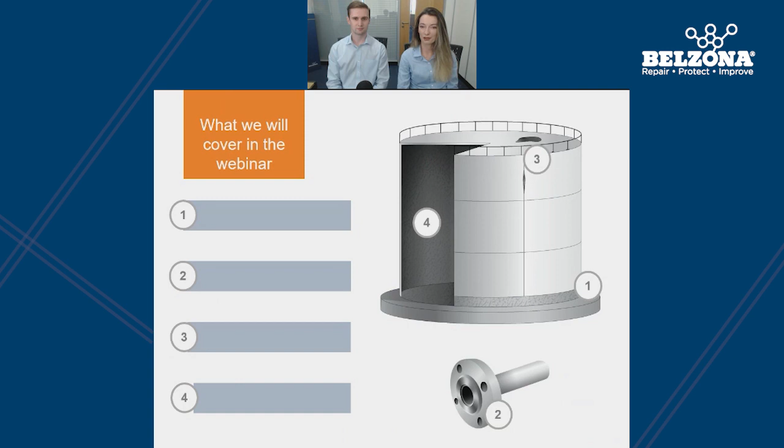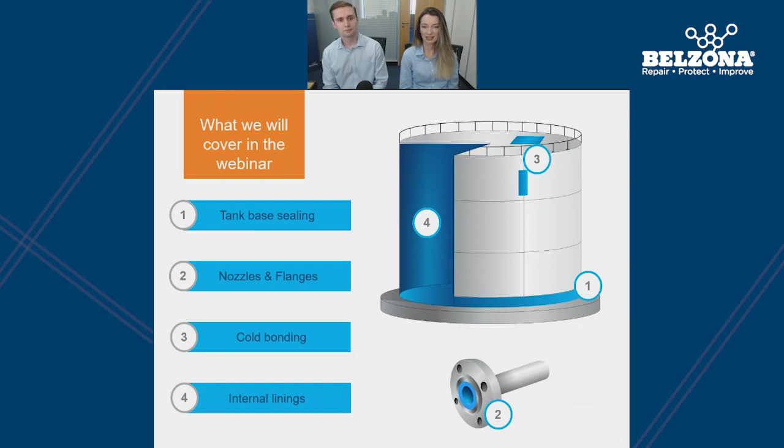So in the next 20 minutes, we'll be going over tank base sealing, nozzles and flanges, cold bonding methods, and internal linings for storage tanks. In this first section, we'll be discussing some of the common problems and solutions we see with tank bases, and also looking at the flexible and breathable Belzona systems used to prevent corrosion at the base of the tank. So now, I'll pass you over to Luke.

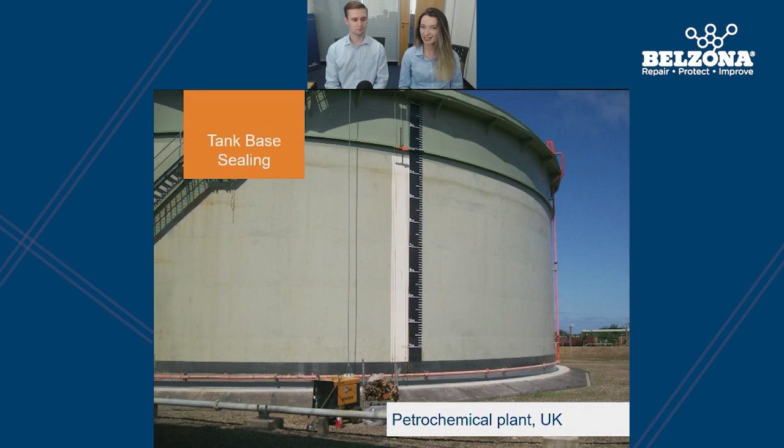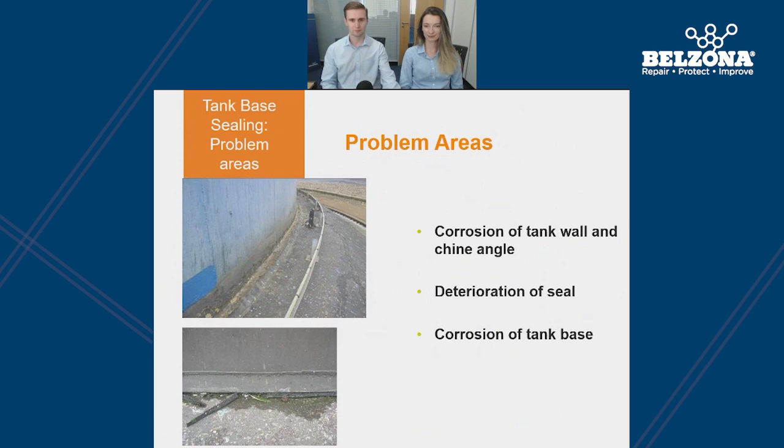Thank you. So we'll start off by identifying some of the key common problem areas with tank bases in industry. So these being corrosion of the tank wall and the chine angle, deterioration of the seal, and also corrosion of the tank base. So to better illustrate this problem, here you can see our steel tank wall, our tank base, and our concrete plinth that the tank sits on.

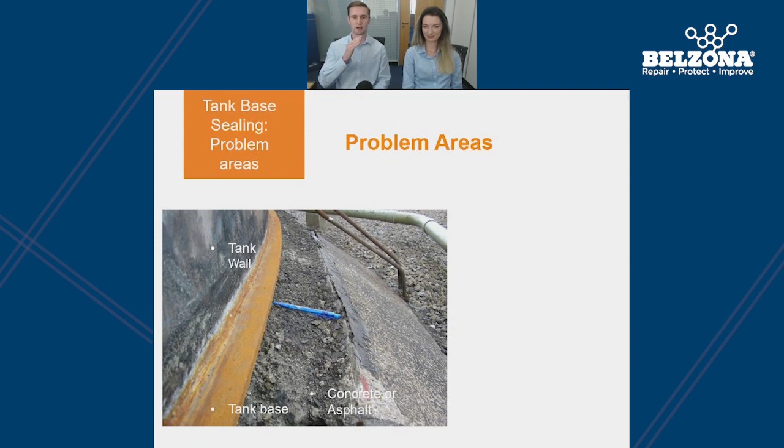So as you can see here, the tank base has deteriorated and broken up over time. So water will no longer be able to flow away from the chine angle, and instead it will sit here at the interface. So as the tank naturally expands and contracts, water will be drawn in at this point by capillary action, causing further corrosion at the base of the tank.

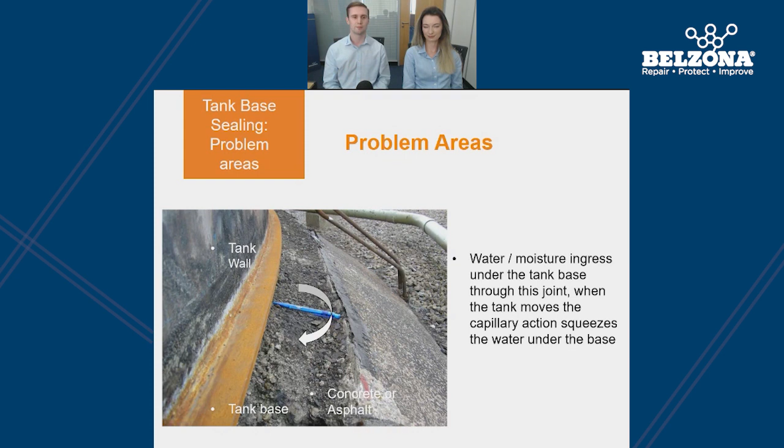So now that we know some of the common problems, we can look at some of the conventional repair methods. So first up, we have mastics and bitumen-based. However, the problem here is that they degrade very easily due to UV exposure, and as the tank naturally moves, they crack and lose their seal. Another common repair we see is steel skirt. However, this involves hot work, and as the newly welded steel isn't protected, over time it will start to corrode again.

Finally, we have bonded rubber, which again, over time, degrades from the effects of UV and weathering, leading to regular replacement of the system, meaning lengthy downtime. So we'll now look at the Belzona solution for protecting tank bases. The Belzona solution, as we can see here, is a flexible microporous system which adheres to both concrete and steel substrates, offering corrosion protection at the base of the tank.

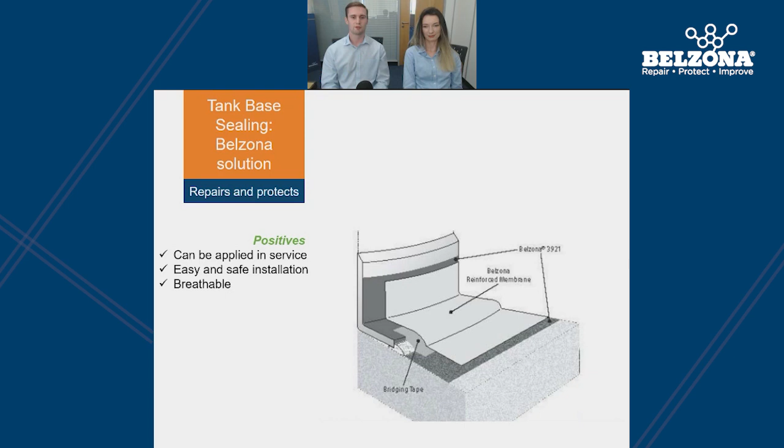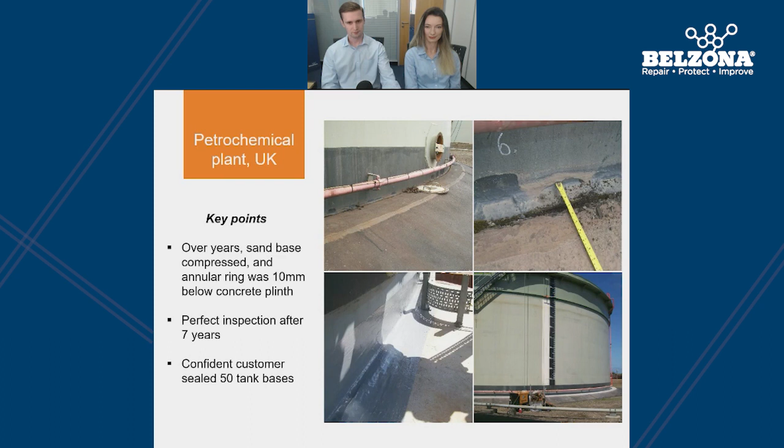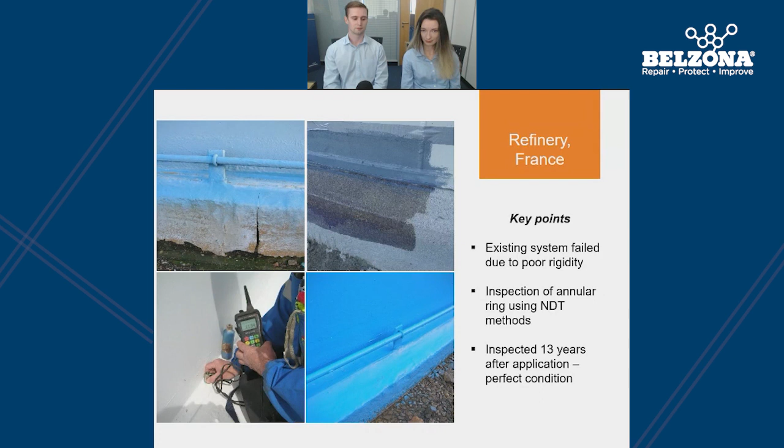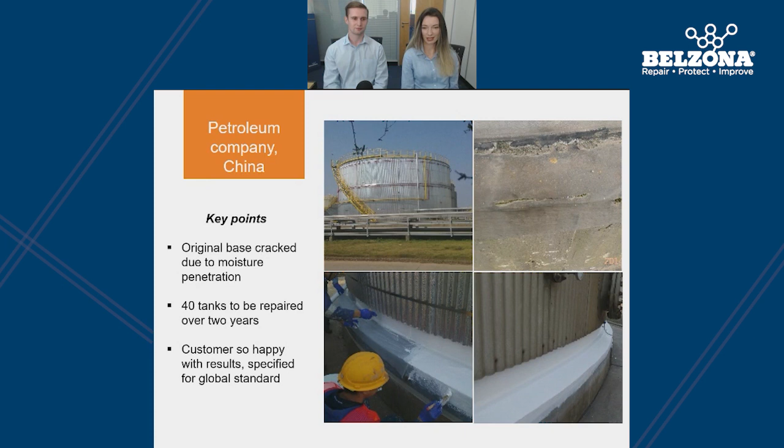After the application, the customer was very happy with the results, and consequently, they ended up using this material on all 40 tanks across their site over the course of 2 years. Also, they specified the solution into the company's global standards. So those were just 3 case studies to demonstrate Belzona materials being used in the field. However, we have performed tank-based sealing applications all over the world.

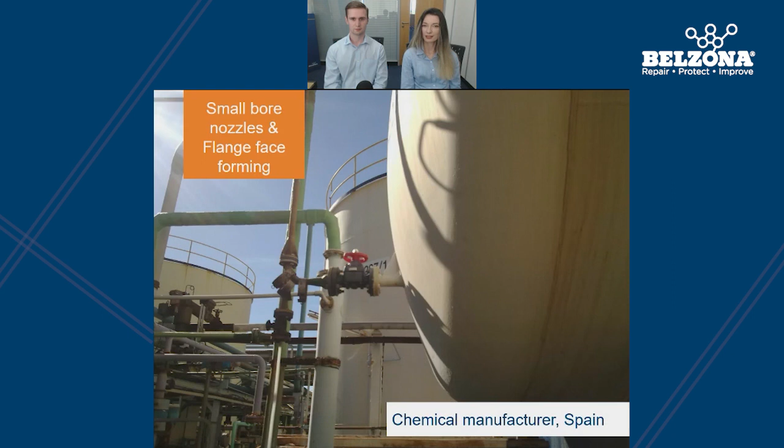So now we're moving on to the next section, and we'll be covering some conventional methods for the protection of small bore nozzles and flange faces. We'll also look at the Belzona solution for these tricky application areas. So the main problem we see with flange faces within the industry is corrosion on the flange face. So this can be caused by several factors.

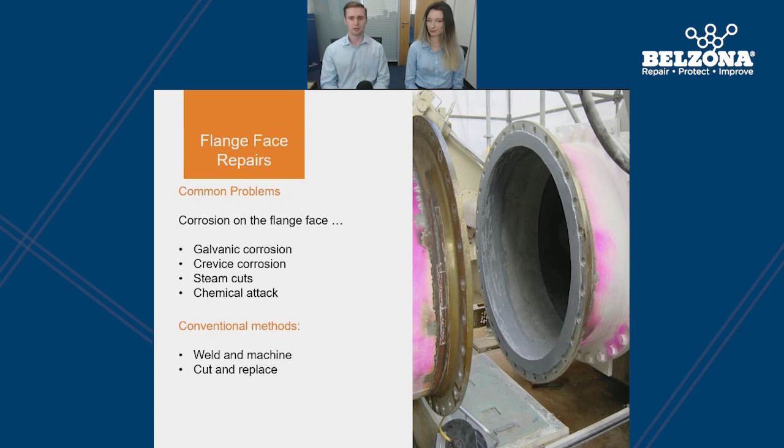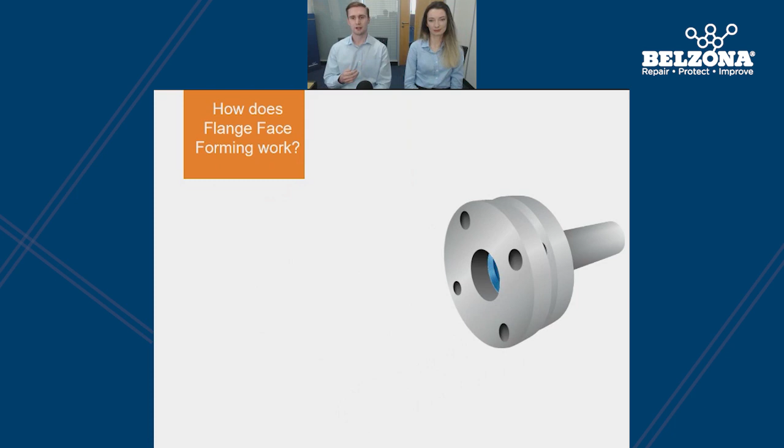So now that we've covered some of the common problems and methods, we can take a quick look at the Belzona solution for repairing flange faces. So how does Belzona flange face forming work? So the Belzona solution is cold applied, and it uses Belzona paste grades to recreate the sealing face using a mold designed to replicate the original dimensions of the flange face.

So the Belzona solution is 100% solids and contains no solvents, so the exact dimensions can be formed. The Belzona solution is also an electrical insulator, so it eliminates any metal-to-metal contact, which means the risk of galvanic corrosion is also eliminated.

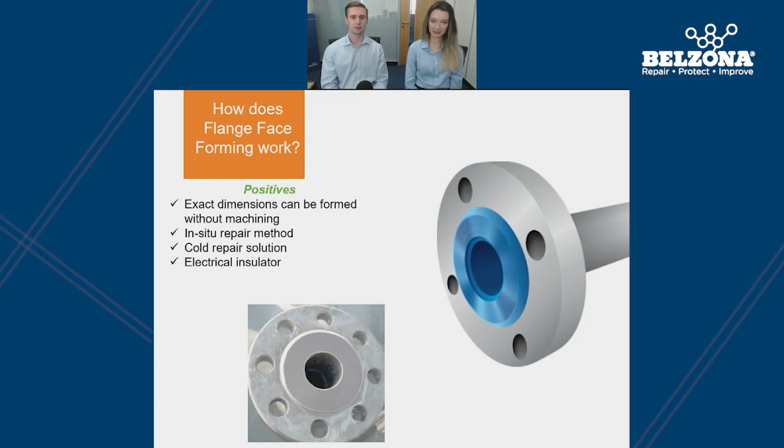The next area we'll be covering is small bore nozzles. So how do we protect nozzles with a 4-inch diameter or less? Often this application is left to contractors who paint very much on a best efforts basis. This is due to the very limited access, which makes it very difficult to achieve an ideal surface preparation and also an ideal coverage of the protective coating inside the nozzle.

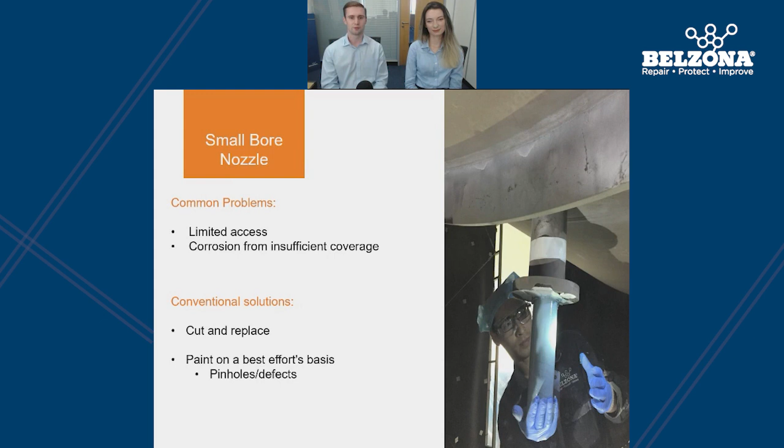The conventional solution for dealing with smaller nozzles is to cut and replace the nozzle. However, this requires hot work and will not eliminate the problem, or as mentioned, to paint on a best efforts basis. So now that we've identified these conventional solutions and their drawbacks, we can take a look at the Belzona solution.

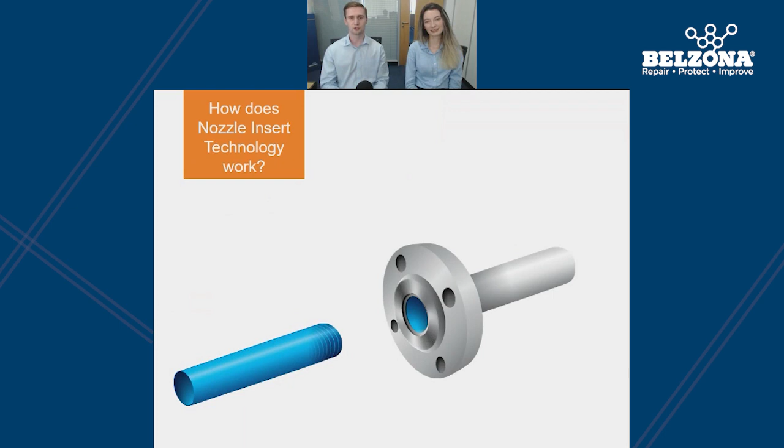So the Belzona solution eliminates any guesswork with small bore nozzles and ensures 100% coverage of the protective coating. So we can do this by prefabricating a section of pipe made from a suitable Belzona material. This is then bonded in place using a Belzona adhesive, which will offer optimum long-term protection against corrosion, erosion, and/or chemical attack.

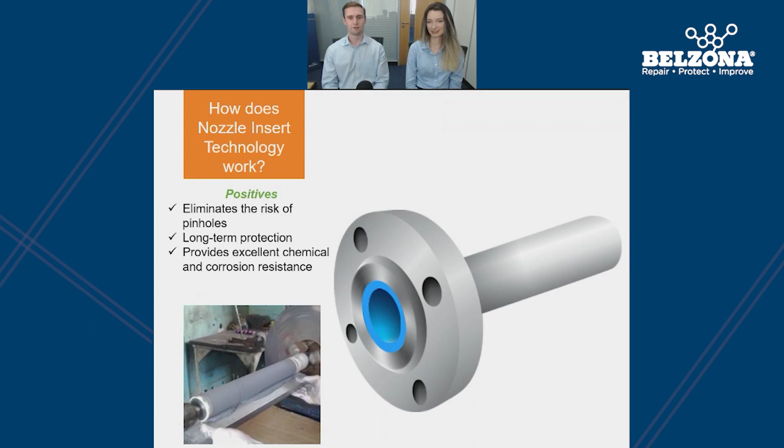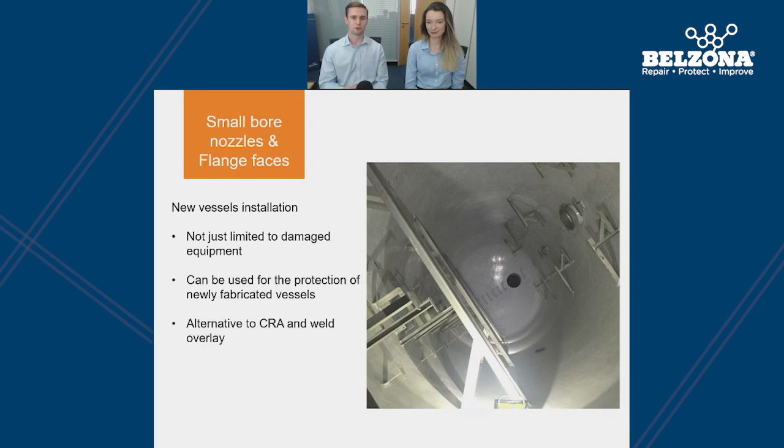However, nozzle inserts and flange face forming techniques are not just limited to damaged equipment, but both systems combined can also be implemented as part of the design for newly fabricated vessels. So these Belzona solutions have been used with carbon steel instead of solid, corrosion-resistant alloys for the nozzle and/or weld overlay for the flange faces.

This case study took place in Spain at a chemical manufacturer. Here, the interior of an ebonite lined nozzle handling 26% hydrochloric acid had suffered damage from the acid and needed a replacement.

However, relining the ebonite would not have been a very cost-effective solution, and therefore a Belzona nozzle insert was chosen to be installed instead. Not only was this better price-wise, Belzona's system had excellent chemical resistance, so will last for the long term. Plus, the application allowed a fast back-to-service time for the tank with its easy in-situ repair.

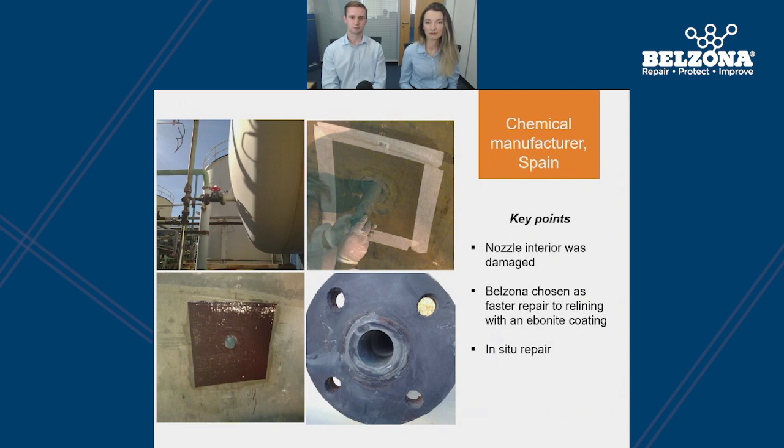Now, in this next section, we'll be talking about how you can use cold applied solutions for plate bonding when carrying out work on the outside of the tank, whether that be the wall or roof. So to start with, Luke's going to look at the most common solution for plate bonding, welding.

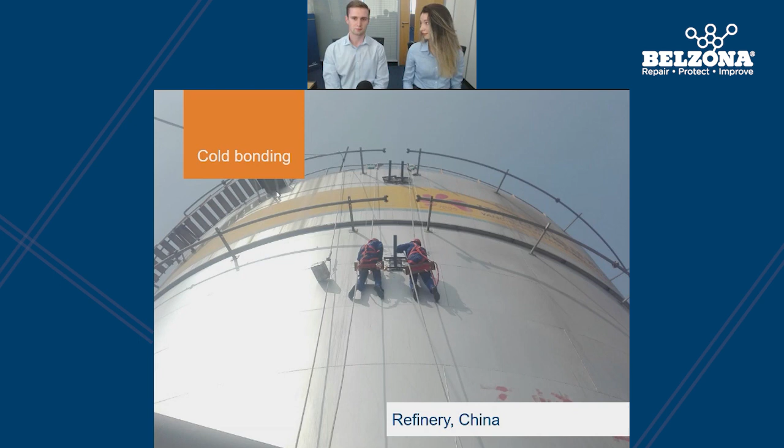So when we talk about adding strength back into the structure of a substrate, welding a plate onto a defect area is a very common method of repair. It provides a strong bond and is a very well-established method. However, before a tank can be welded, it must be drained, which means lengthy downtime and also a loss of resources.

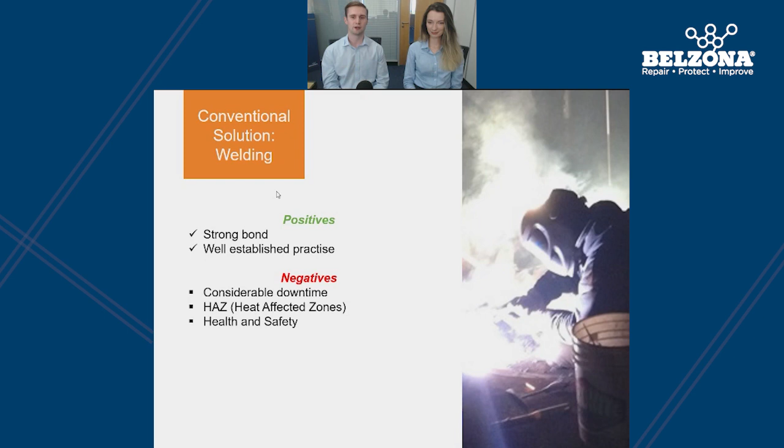Welding also creates a heat-affected zone, so it introduces heat stresses into the metal, which can result in further problems such as cracking later down the line. And as always with hot work, there'll be health and safety risks. Another downside to welding is that there's actually fewer points of contact when welding, which leaves a void between the plate and the wall.

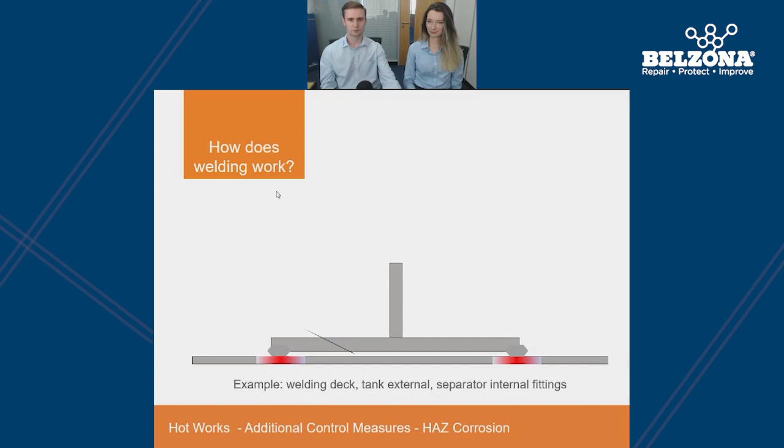So this very simple animation demonstrates a plate being welded onto a metallic substrate. As we can see, the plate is only welded to the substrate at either side of the plate edges. So these are the only 2 points of contact at which the load is transferred between the plate and the wall. So if there was a through-wall leak, for example, this gap would fill up with fluids, allowing the plate to be very susceptible to crevice corrosion.

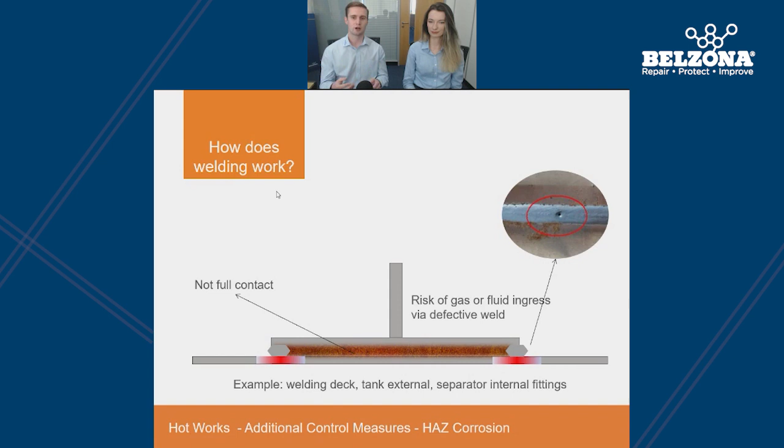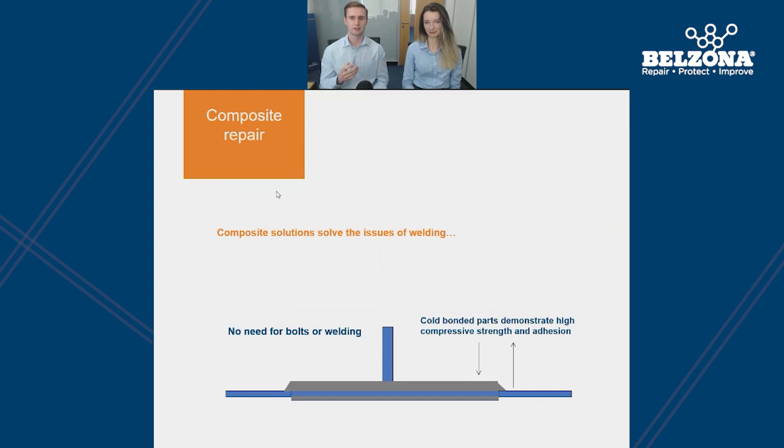And as mentioned previously, these welded areas have also created heat-affected zones. This will change the microstructure of the substrate, which again could cause cracking later down the line. So we'll now look at the Belzona solution for bonding. As demonstrated on the screen, the Belzona solution offers 100% contact on the substrate, which gives an excellent load distribution. The Belzona material, also being non-metallic, acts as an electrical insulator, eliminating any potential for galvanic corrosion and therefore offering long-term corrosion protection.

So now that we've gone over welding and understand how cold bonding works, we can look at the different types of cold bonding solutions. Metallic plate bonding has been successfully used for over 20 years as a repair method. However, in recent years, composite plates have also been used to offer a non-metallic solution.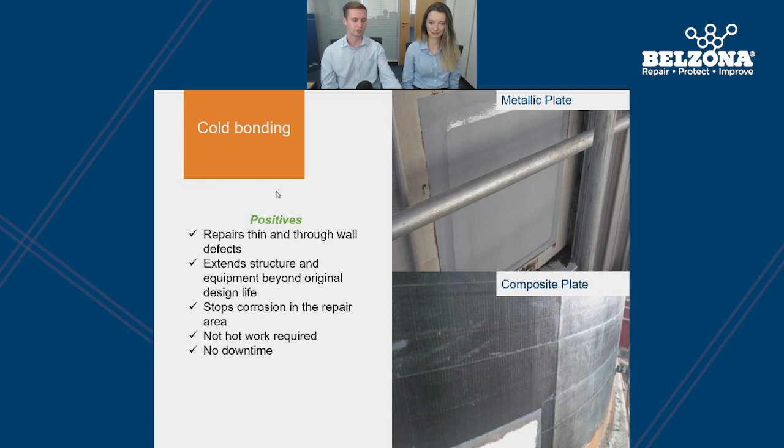Some of the positives of using the Belzona solution include no downtime, as no hot work is required, and therefore no requirement to drain the tank. Cold bonding techniques can also be used to repair thin and through-wall defects, extending the structure and equipment beyond its original design life. So we'll now watch a video on welding versus cold bonding techniques. I'll just put that on the screen for you.

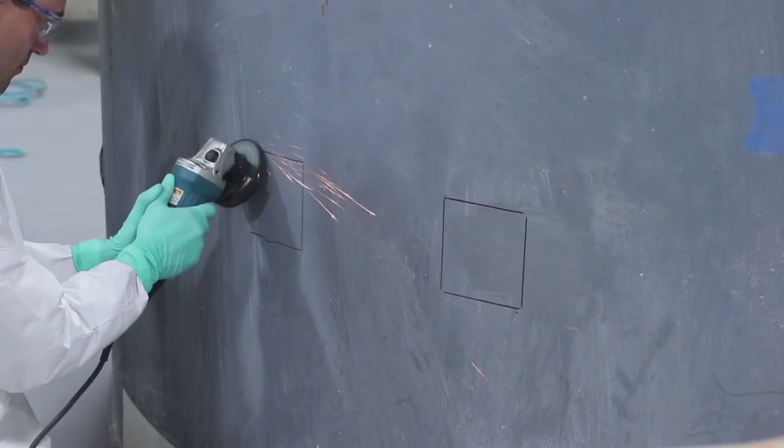Demonstrating the pros of cold bonding versus welding. We attached 2 brackets to a tank. One was attached to the tank via welding and the other via cold bonding. Before we began, we marked out the perimeter of the brackets. For the welded bracket, we prepared the surface area outside the perimeter since welding is done at the edges. We then proceeded to weld the bracket.

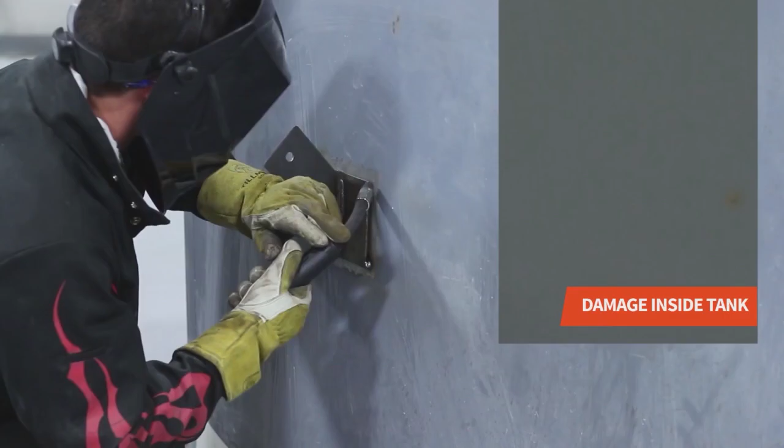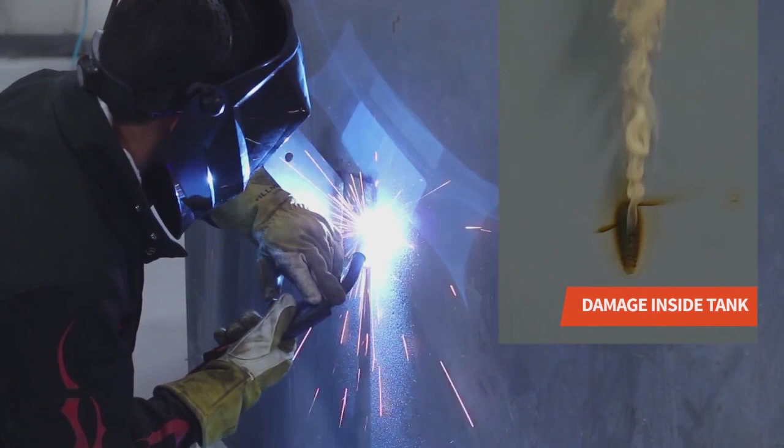As you can see in this video, the tank lining started burning as soon as we began welding. We had to stop welding for safety reasons. For the cold bonding application, we prepared the area inside the marked perimeter since bonding is done on the whole surface of a bracket.

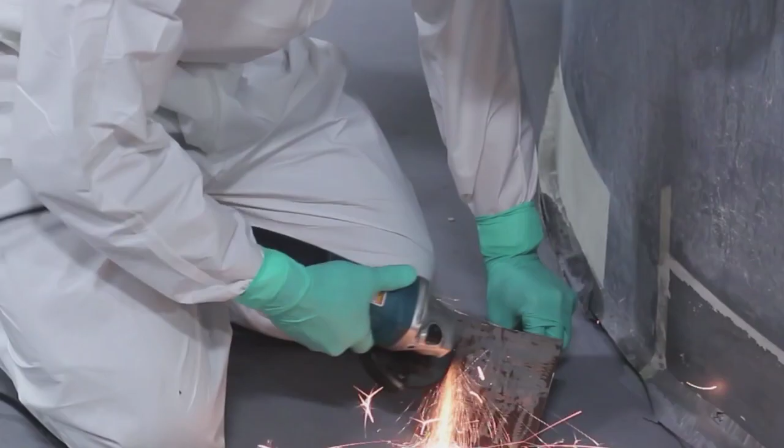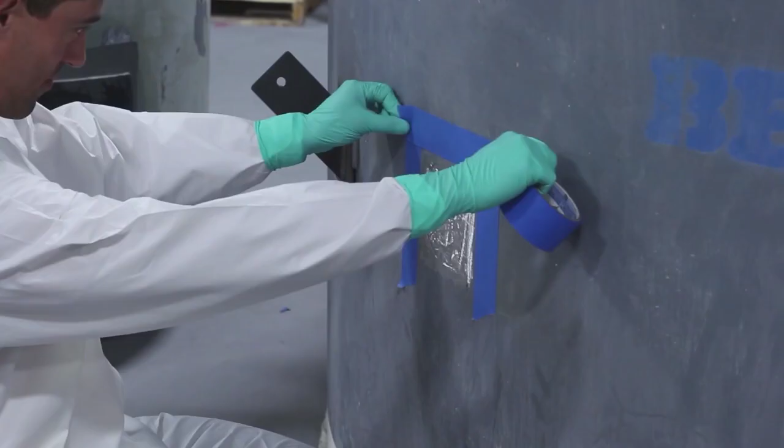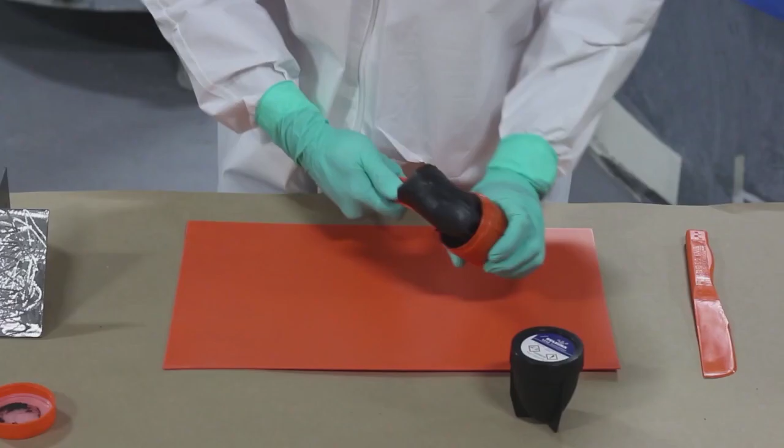We then prepared the bracket. Next, we masked off the application area. We proceeded to clean the area to remove any loose particles. We then mixed our bonding material, which in this case was Belzona 1212.

After mixing, we applied a thin layer to the application area with a stiff bristled brush, pressing hard to make sure the product fills the profile.

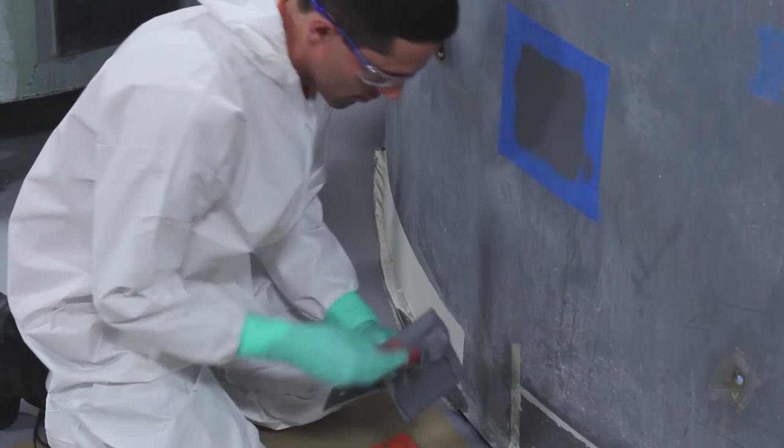We then applied a thin layer of the product to the bracket surface, and more product was applied to build a central peak. We proceeded to attach the bracket to the tank by pressing it with force onto the application area, making sure the product squeezed out of the sides. We cleaned the excess product off the edges of the bracket.

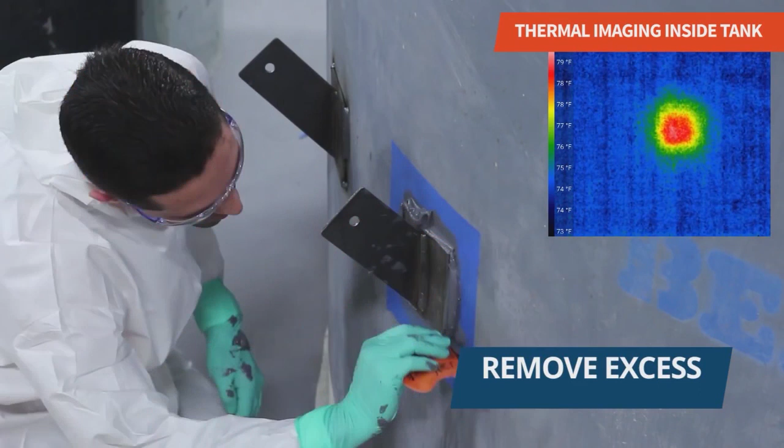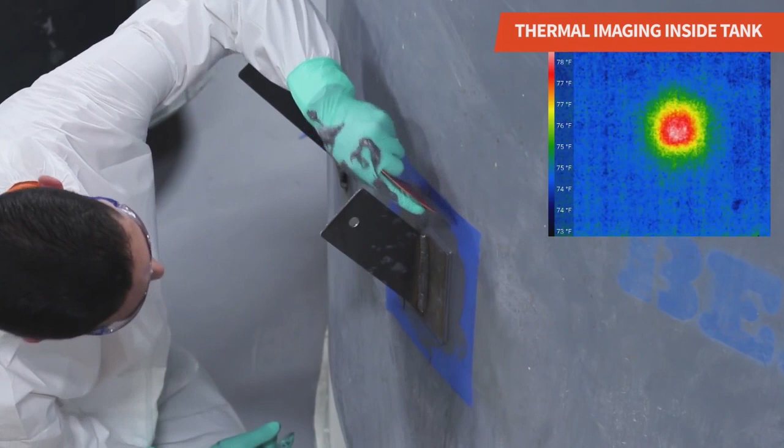We took temperature readings via thermal imaging, as you can see in this video. A maximum of 79 degrees Fahrenheit was reached, which is safe for both the tank lining and content. And removed the masking tape to finish the application. Cold bonding is a more practical and safer choice.

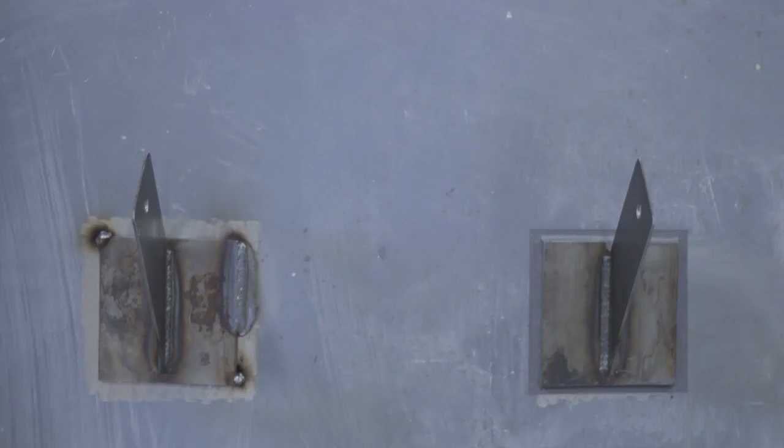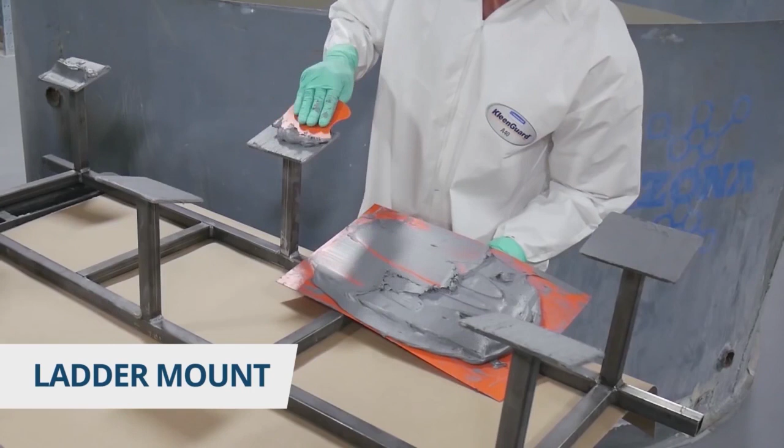Here are a few samples of other cold bonding applications: live leak repair on a tank, mounting a ladder or cell phone antenna to the side of a tank, or even repairing the weld seams by injection. For now, though, we're going to move on to the case study section.

So the first case study was prompted by legislation change in China. This meant that VOC treatment was required to be implemented on all oil tanks across the country. This required the customer to attach pipe rigs to the tank wall, but with hot work restricted in the tank farm, a cold bonding solution was necessary, and therefore Belzona was the ideal solution.

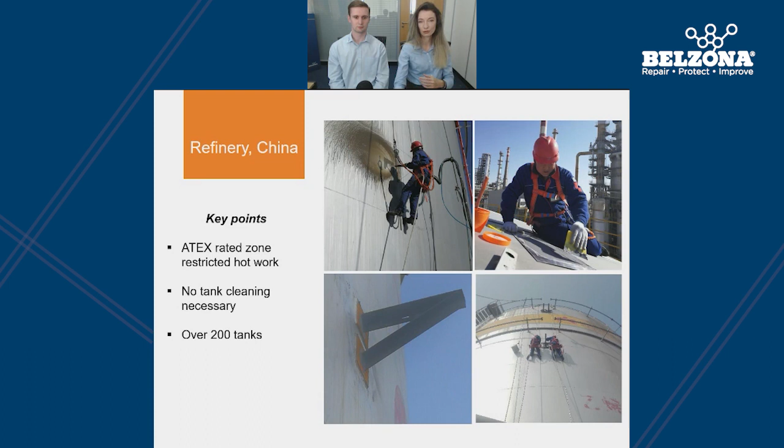To begin with, for this application, they used vapor blasting to prepare the surface. This was necessary as grit blasting was not allowed in this ATEX rated zone. The applications were a big success, and the customer was very happy with the result. So much so that after the first application for 18 tanks, they decided to use the system for more than 200 around the region. And here is a similar case study, but in the Netherlands.

We chose these case studies to show you that cold bonding can be used for plates and so much more. In this case study, the company wanted to bond a water sprinkling system and a foaming system on top of their oil tanks. However, once again, hot work and grit blasting were banned on site, obviously.

Therefore, for each tank, the substrate was prepared, this time with a dust-free blasting system, in order to achieve the right surface roughness, without generating dust and any potential fire hazards near the oil. In total, over 1,000 brackets and supports were bonded onto the sides and tops of 8 different storage tanks, again leaving another satisfied customer.

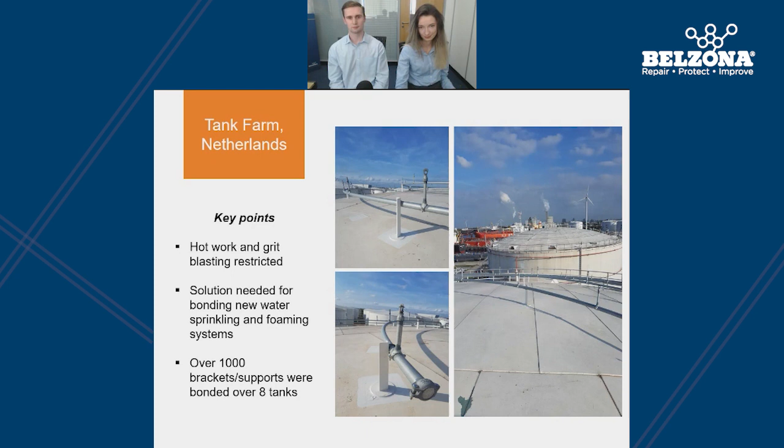So our presentation is almost finished, and this is our final section before our Q&A with the engineers. So you can start thinking of some questions, but for now, we're going to look at internal linings, specifically for the protection of the floor and bottom sections of storage tanks.

So a common problem we see in storage tanks is corrosion on the internal surface of the tank. However, generally the only areas affected by corrosion are the tank floor and maybe 1 or 2 meters up the side of the tank wall. This is because of a mixture of water and hydrocarbons in the tank. And as the density of the water is higher than the hydrocarbons, the water will sit at the bottom of the tank, which is where the corrosion will occur.

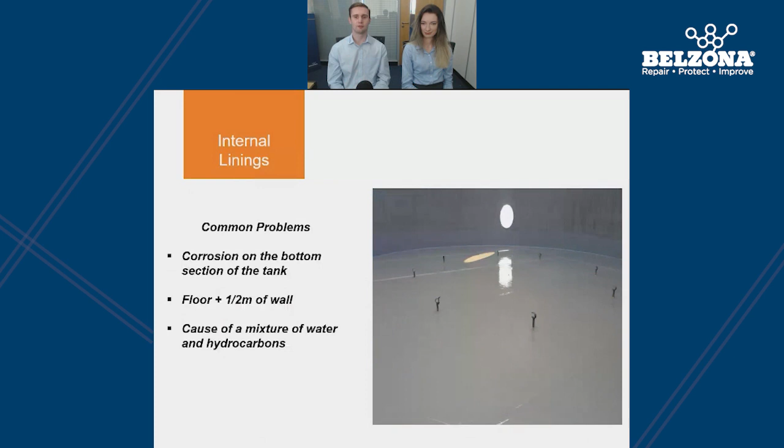So now that we've identified this problem and the reasons behind it, we can take a look at the range of solutions that Belzona can offer to protect these tanks. Belzona have a varied range of products which can be used to restore the damaged tanks. Paste grades can be used for pit filling, and plate bonding methods can be used for the larger areas.

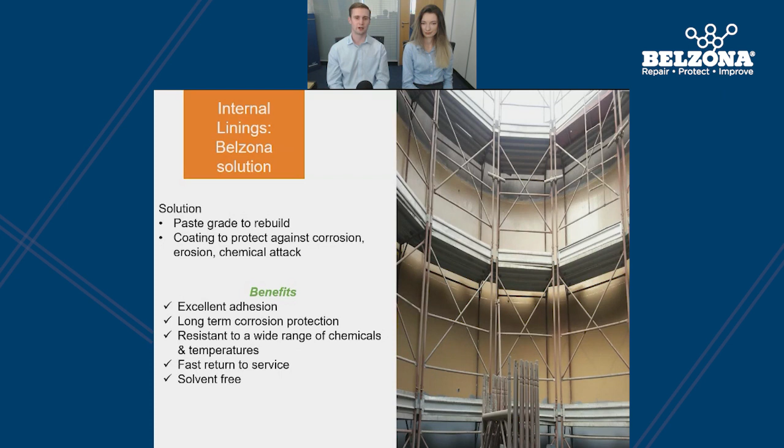So once the structure of the tank has been restored using these methods, the tank will then be coated with the most suited lining based on the operating parameters of the tank. The lining will then be able to offer corrosion resistance in immersion, steam out resistance, and also chemical resistance. So we'll now take a look at a couple of different internal lining applications on storage tanks around the world.

So here we have an oil company in Tunisia who are experiencing severe pitting at the bottom of their storage tank. And as this was a rivet tank, welding wasn't an option, otherwise the rivets would pop off one after another. The Belzona solution here was to pit fill the smaller localized pitting and then use plate bonding for the larger areas.

The tank was then coated with a Belzona lining, which was selected based off the operating parameters of the tank. As the corrosion was due to a mixture of water and hydrocarbons, only the floor and the lower section of the tank wall, as you can see in the pictures, were coated.

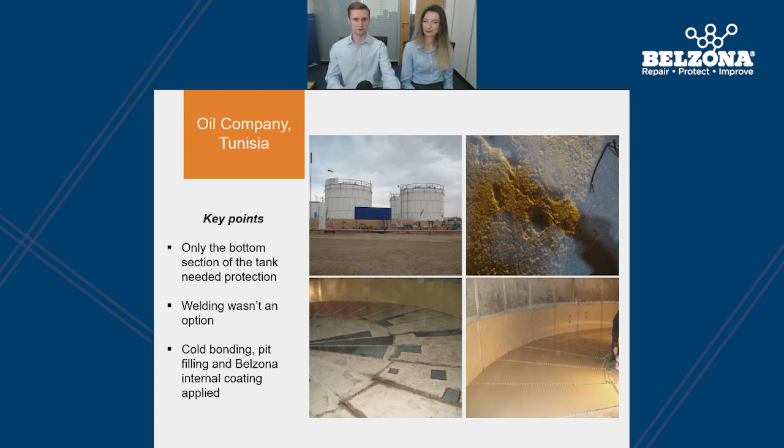Again, here we have a very similar problem in a petrochemical plant in Italy. A mixture of water and hydrocarbons were present within the tank, resulting in pitting at the base of the tank. The Belzona solution was to pit fill the localized damaged areas and to use an internal lining based off the operating conditions of the tank to coat the floor and also the bottom section of the tank wall again.

So this type of repair is something that Belzona is very experienced in, and due to a wide range of internal linings, we can make sure the correct lining is selected based off the individual operating parameters of each tank.

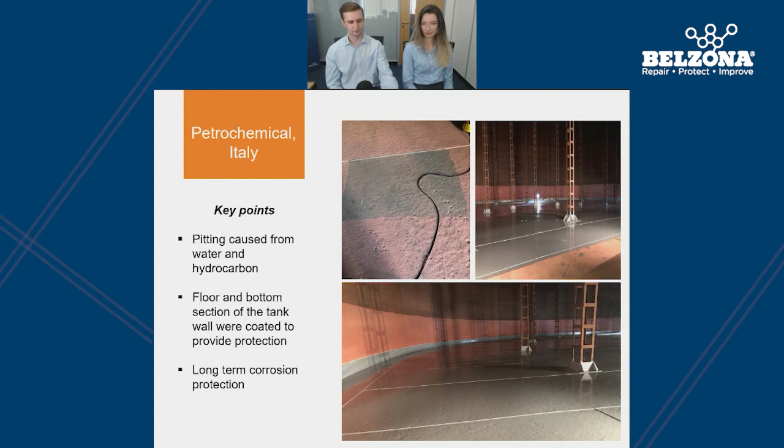We hope that in the last 20 minutes, we've given you an insight into how Belzona solutions can be used for tanks, even though there's honestly so much more we could have covered, such as flange encapsulation, floating roofs, external protection. We wanted to keep this webinar not too long.

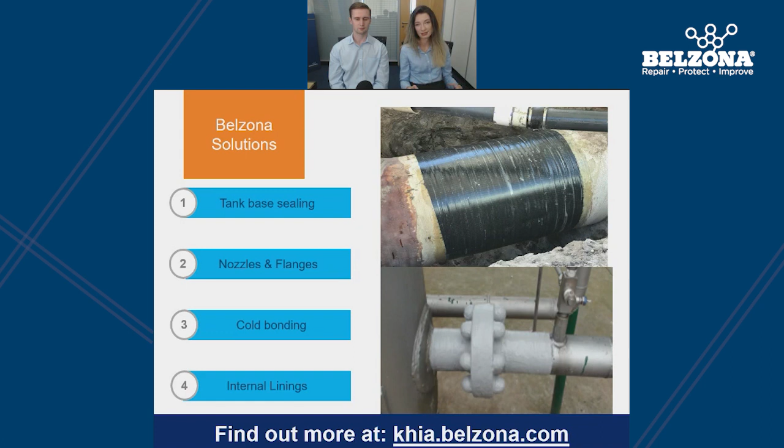For nozzle inserts, what can you bond it with? Pretty much any Belzona coating that you want to. Again, it depends entirely on the process that you're looking at. A lot of the time we do it with 1321 because it has a really good adhesion to steel. But if it's not erosive service, the chemicals are slightly different, or it's a higher temperature, you could potentially use any of the other Belzona coatings. Again, some we have tested, some we haven't. So it would be up to yourselves maybe to do a trial beforehand, or we could do a trial.

What level of surface preparation is required for internal pit filling and small areas of internal corrosion? Okay. So for surface prep, if it's for internal, so it's going to be in contact with the process or the liquid or whatever is inside the tank itself, then we'd always recommend grit blasting 100% of the time. That gives you the best possible bond, and even if this is being covered with a coating, you want that pit fill material to stay in the pit. You don't want it coming out from underneath the coating.

So 100% grit blasting. In some cases you maybe can't do grit blasting because of hot work restrictions and things like that, in which case we can look on a case-by-case basis and maybe go down to something like a bristle blaster or grinding, but it very much depends on the situation.

Can we repair damaged PTFE internal lining with spools or nozzles? If yes, what's the product? Potentially, yeah. PTFE is one of those materials where adhesion's a bit of an unknown, because with steel we know that Belzona adheres to it, and with PTFE we tend to do a lot of testing specific to that application before we suggest the product.